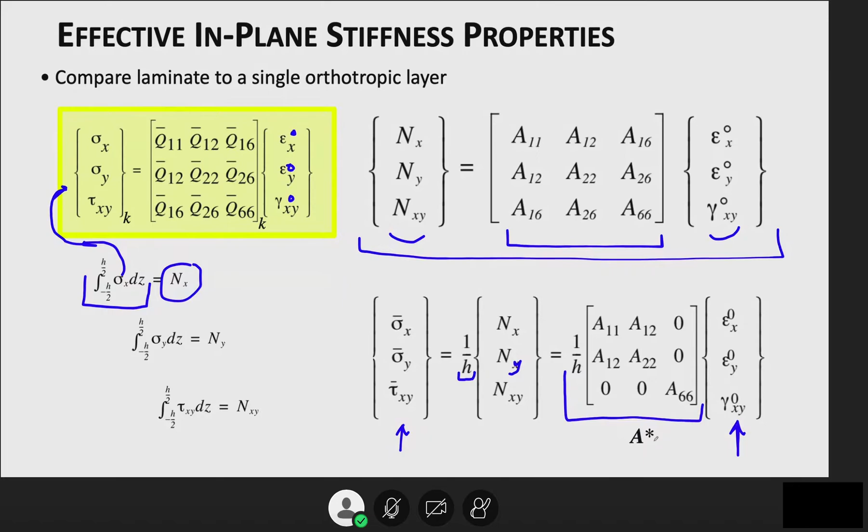And then I compare that relationship to the in-plane stiffness properties of an orthotropic layer, which has some Ex, Ey, Gxy, and if I take the Q for it, assuming the thickness to be H, I can make the comparison between these two, and I can solve for Ex, Ey, and Gxy in terms of the A's. So my overall effective stiffness Ex is now written in terms of this A matrix: 1 over H times A11 A22 minus A12 squared, divided by A22. This is sort of a modulus for the entire laminate in the x direction.

So given the A matrix of a laminate, which could be 100 layers, 200 layers, as long as I can compute the A matrix for it, divided by the total laminate thickness, I get a modulus for the entire laminate in the x direction.

And then similarly, there is a relationship for EY. The only difference is now this divides it by A22, this divides it by A11. EY, the modulus of the entire laminate in the Y direction, is computed from the A matrix this way. The shear modulus is simply A66 divided by H, and the Poisson's ratio is the ratio between A12 and A22. Okay? These are now my effective properties of my laminate.

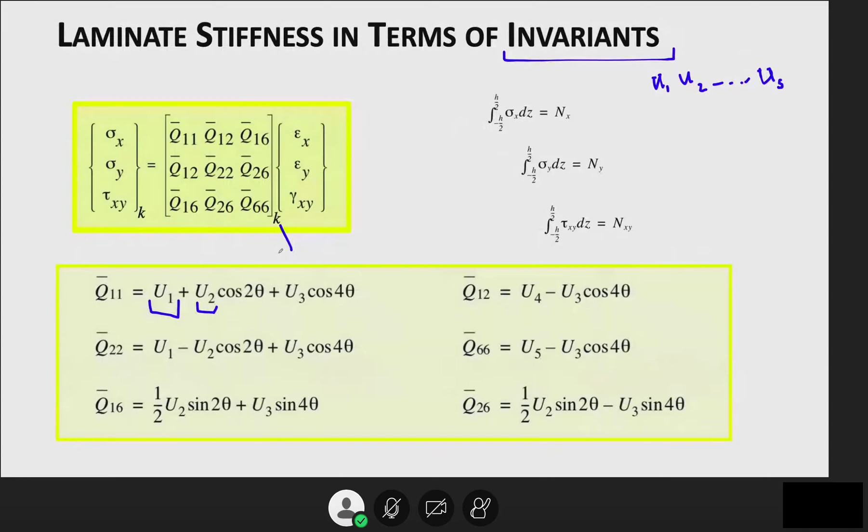I jumped again. Cosine theta is not a continuous function, it's actually a piecewise function. So we made plots of theta as a function of z. This was z, and the variation was maybe 45 degrees, then minus 45 degrees, then 30 degrees, then minus 30 degrees, then 0 degrees, then maybe some other angle. So this is a piecewise variation, but we're writing it as continuous. That means these can be turned into summations as well. But as a definition, V1 is the integral of cosine 2 theta dz.

If we do that, we get the matrix form in terms of V0A, and A11 will be U1 times V0A plus U2 times V1A, no V2, and U3 times V3A, and no V4.

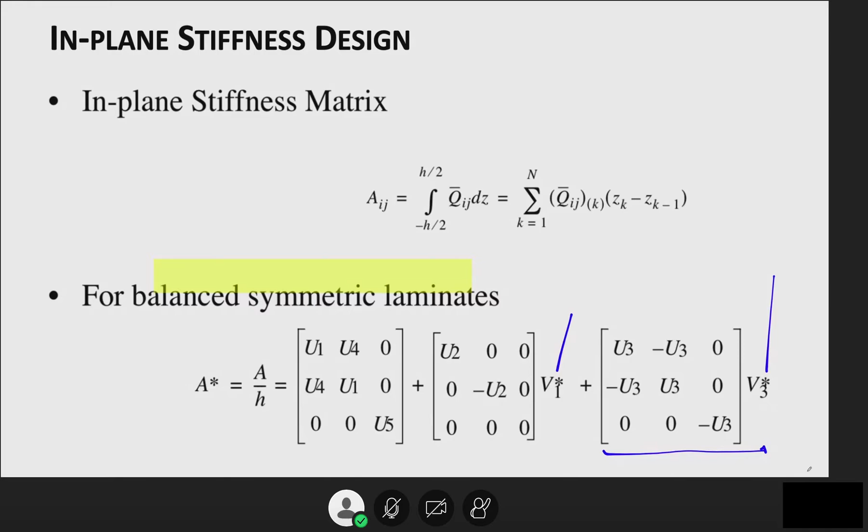And then V3 star is the integral of cosine 4 theta. You see, we again split the design quantity A into some material property constant times nothing, plus another material quantity times the integral of the orientation angles, V3. So, in fact, for this problem, the A star matrix is defined completely by two quantities, V1 star and V3 star, which are integrals of these.

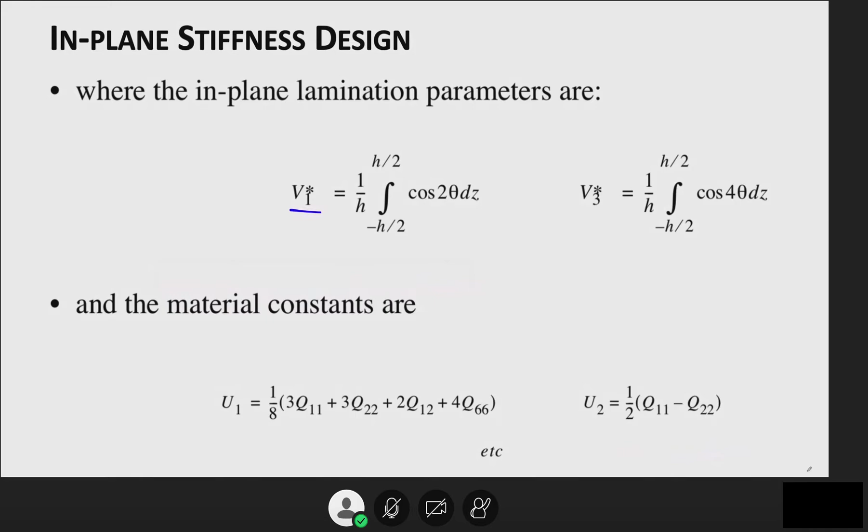After this, we are going to start calling them lamination parameters. And instead of the integrals, we're going to replace them with summations and come up with these new definitions. But that I will do in the next lecture. And then we're going to be able to generate very nice plots called Miki's diagram that you'll be able to actually design with. Regardless of the number of plies, each point in this diagram will be some stacking sequence that will meet all of our stiffness requirements. Okay, but we're going to start doing that next lecture.

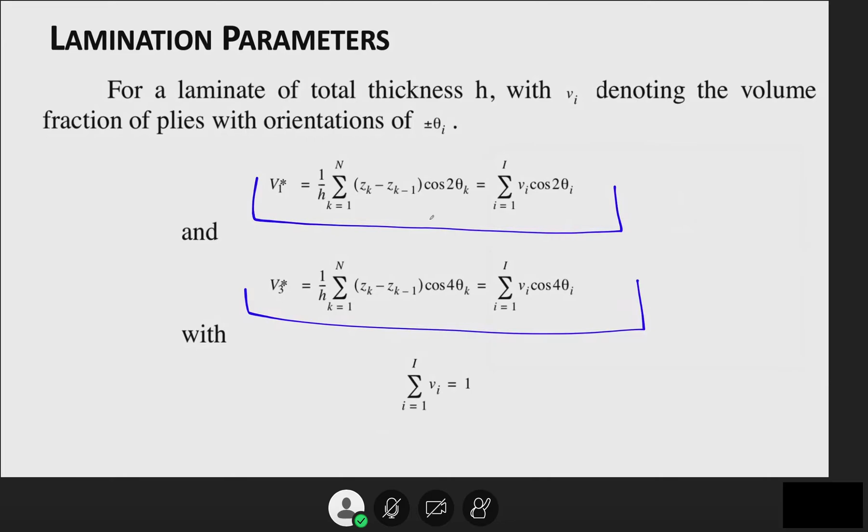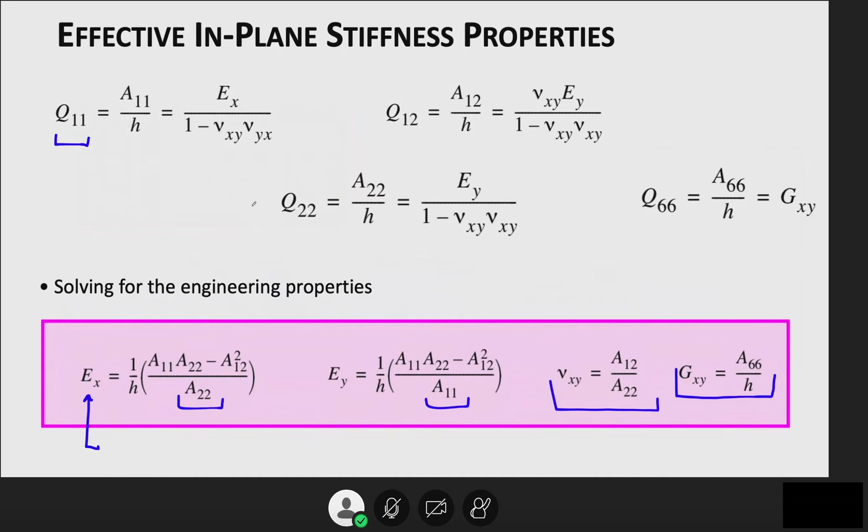So going back, now we're going to concentrate on what we call the effective in-plane stiffness properties for the laminate, EX, EY, GXY, and νXY. Any questions so far? Questions?

It's 7-1. Mohan also wanted a project, so let me mark that as well. And are we still missing?

So the lamination parameters are a function of what ply angles you are using. That's absolutely correct. So everything about orientation stacking sequence design is lumped into an integral of all of those orientation angles. Even if you have 100 layers, you integrate them, and you'll be able to write the A matrix for that laminate.

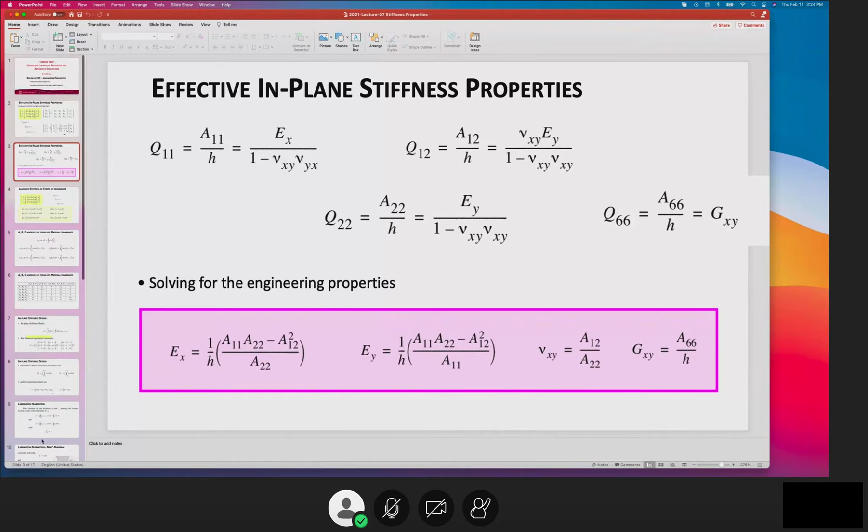So here, all of the ply orientation angle information in the A matrix is in V1 star and V3 star. So regardless of the number of layers, if I assume V1 and V3 star to be unknowns, and I have a stiffness requirement that A11 has to be a certain number, I don't have to know the orientation angles. I can find V1 star and V3 star as continuous values. I can analytically solve it.

And then any laminate whose integral of the orientation angles meets this will be an acceptable laminate. And there will be hundreds of different laminates that I can use that will meet the same design requirement in terms of stiffnesses. This is the crux of the matter. So it's a really nice thing, but we're going to learn how to do that in the next lecture. Okay.

Any other questions? So, by the way, the reason I said this is, if you're not reading your messages, Alex was asking if the lamination parameters are only functions of the ply angles. The answer was yes, and the integral of those through the thickness, regardless of the number of layers that you have. And you will see that these V1 stars and V3 stars are normalized quantities, and they only vary between -1 and 1, because it's the integral of cosine theta divided by the thickness. All right. Any other questions?

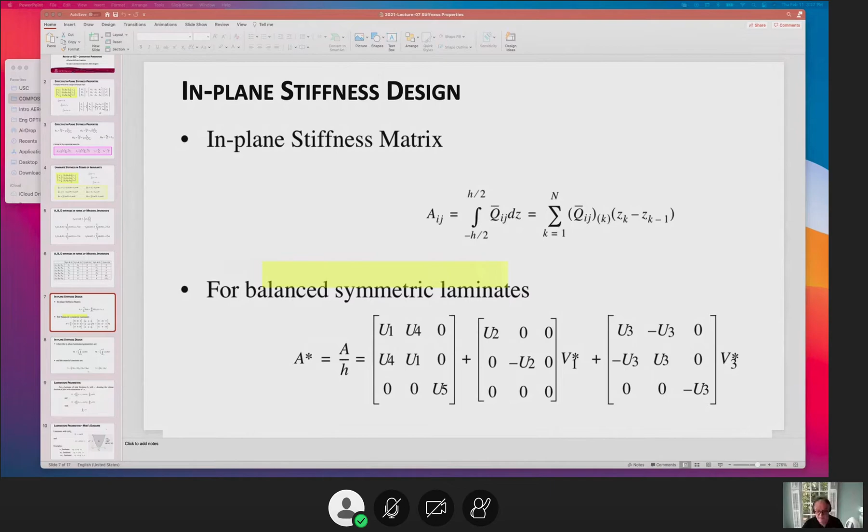Let me get some tea. And let's go and do our tutorial that you will, I think, find interesting because we see these equations all the time. Whether I should have recorded this lecture because Samuel is not there. Samuel is not there. I didn't record, but I can start recording now.

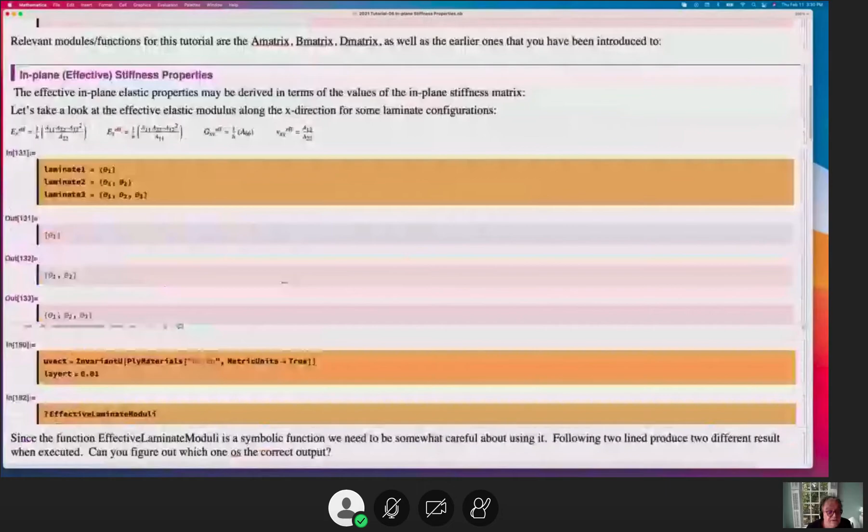Theta 1, theta 1, theta 2, theta 3. I do not know what those are right now. I'm going to leave them as symbols. But I'm going to do this for a specific material property called glass epoxy, and I'm going to use layer thickness of 0.01.

And the first module that I want to look at is called effective laminate moduli. What would this do? If I give a list of stacking sequence, and if I provide the invariant material property U, and if I have the thickness, it will compute EX effective, EY effective, GXY effective, and NUXY effective, and give them back to me.

This is just like calling the A matrix. Okay, we were calling the A matrix with the same quantities as well. This time, instead of giving me the A matrix, from the A matrix properties, it's going to compute the effective moduli.

All right, so effective laminate moduli, laminate 1, and I know what the U vector was. I defined layer T. They are defined up there, right here, and right here. So laminate 1 is single layer, theta. And if I use theta equals 90 degrees, or theta equals 90 star degrees, you can see that this is some quirky thing that I needed to demonstrate.

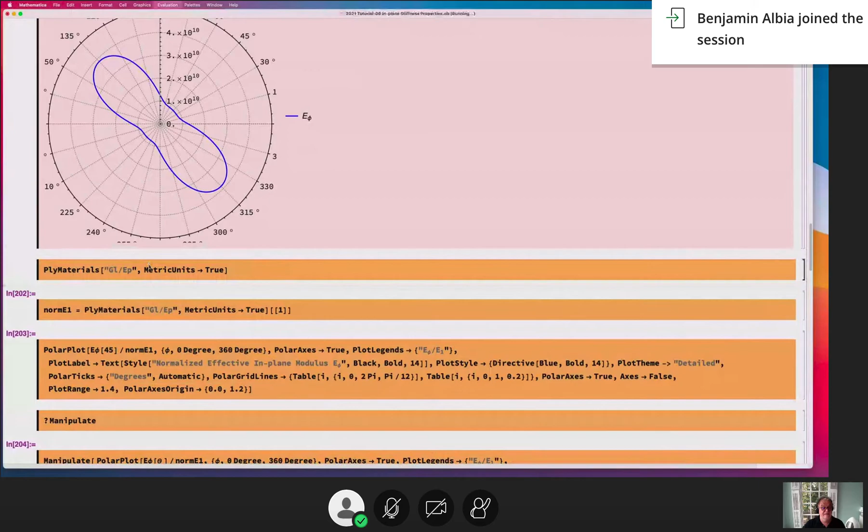And if I want to normalize this, I will normalize this with respect to E1. So I take the ply materials. This will give me E1, E2, G12, nu12 for this thing. And take here the E1. So to normalize, I'll use the normalized E1 value of 3.86 by dividing this E sub phi by norm E. So my plot now is with respect to 1, where 1 is the modulus of it, so 45 degrees. This contour is equal to 1. Okay, you'll see the use of this later on as I go to 2 layers and 3 layers.

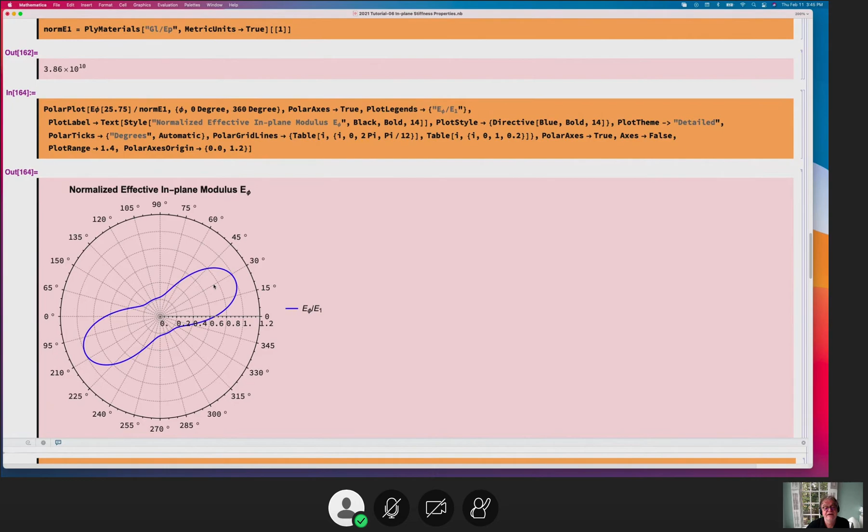So 25.75 layer. This is the largest stiffness, which is normalized 1. In any other direction, in the perpendicular direction, this is only 20% of the longitudinal modulus. So if you're here, this is, I think, 50% of the, each slice is 20%. So this is 20%, 40%, 60%, 80%, 100% of the overall stiffness.

Then I can actually use Manipulate for this function and put here theta and change theta from minus 90 to 90. So for 0 degree, that's what I have. For any other orientation, I can see how the stiffness properties are viewed from different directions. So for a 90-degree ply, this is the strongest direction in the 90-degree ply. It's a 45-degree ply or so.

And these things are going to get a little bit more fun when we go to things like laminate 2, which has 2 angles. And E sub phi for this, 2 angles. So for 2 different angles, this will be the relation as a function of phi. So if I take a plus 45 minus 45 layup, okay, and execute, this is what I get.

This is a plus minus 45 layup, 2 angles. So its modulus, again normalized with respect to E1. This is 1, this slice. Way lower than that. It's actually about 30%. The largest modulus is at 45 degrees, and there it only reaches 50% of the possible E1 that you can have for this laminate. So 45 and minus 45 is not necessarily a very good thing.

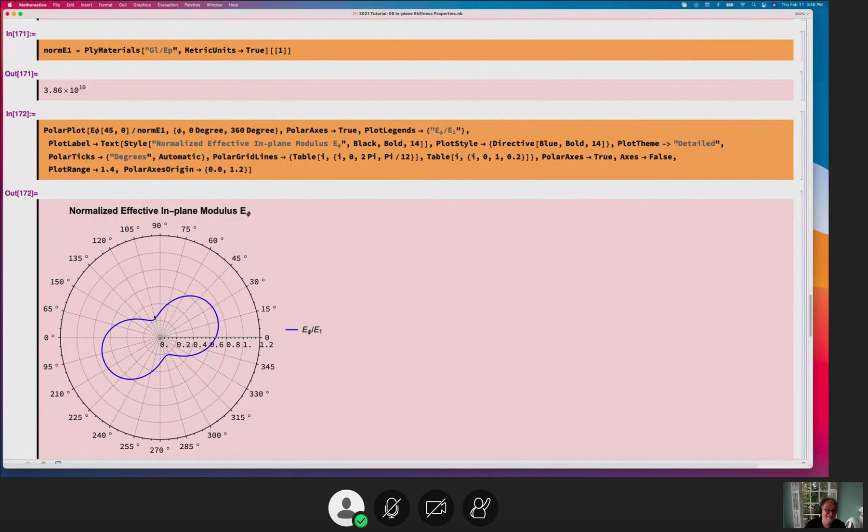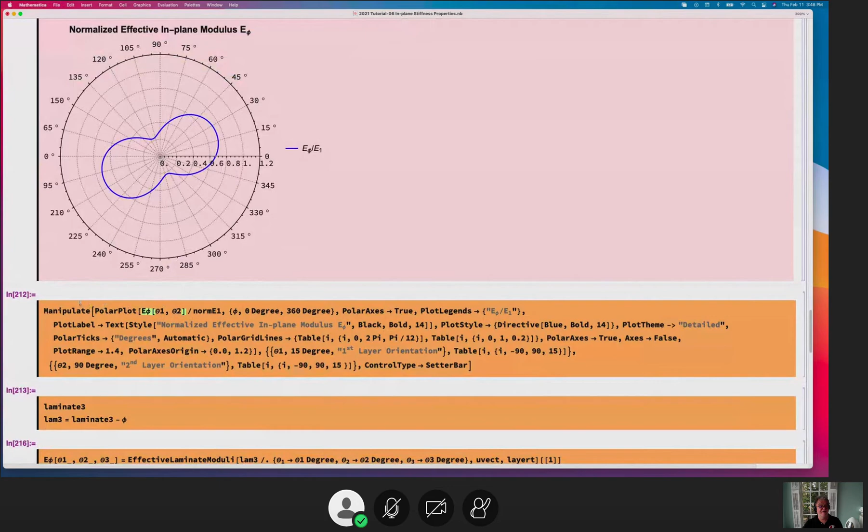And so let's do other combinations. This is a 45 and 0 degree layup. And that's how it looks. The largest stiffness for a 45-0 layup is here at around maybe 20 degrees or so. It's pretty good in the X direction. Y direction stiffness is still lousy, a little more than 20%. It's about 30%. And lowest one is in this direction. And this was 45 and 0. Now, of course, what I will do next is put theta 1 and theta 2 here and put it into a manipulate to change theta 1 and theta 2 independently.

So for a 0-0 layup, this is what I have. For a 0-90 layup, this is what I have. The largest modulus is in X and Y direction of about 60%. And lowest modulus is at 45 degrees. It's a little better than 30%, but not very high. This was a 45-0. This is what I get. Plus minus 45. This is what I get. What else can I try?

30 minus 30. This is what I have. It has a pretty good stiffness here. Lousy stiffness there. Larger region where the stiffness between 30 degrees and minus 30 degrees is fairly high, but not very good in that direction. So there may be an application where you would like this compared to this, or any other combination that you might have. Okay. Is there anything more interesting that I can show you about this?

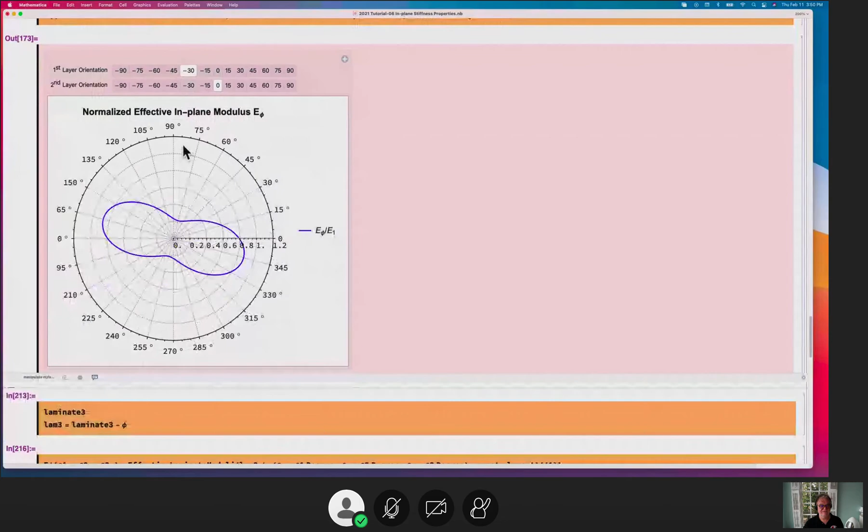Let's go to 3 plies. Same story. We don't have to spend too much time in there. We can actually go directly to polar plots and normalize one. And so this is a plus 45, 0, 60 layup. But if I want, I can put it into manipulate. Have 3 different orientation angles. This is all 0. And this is all 90. If I have 0, 90, 0, that's that. If I have 2 zeros and a 90, that's that.

But let's do something interesting. 90, plus 30, minus 30. I've got a circle. What does that mean? This is the question, gentlemen. Stiffness is the same in all directions. That is indeed correct. Do we have a name for these layups, laminates? It can be treated in its plane as isotropic. Quasi-isotropic. That is absolutely correct.

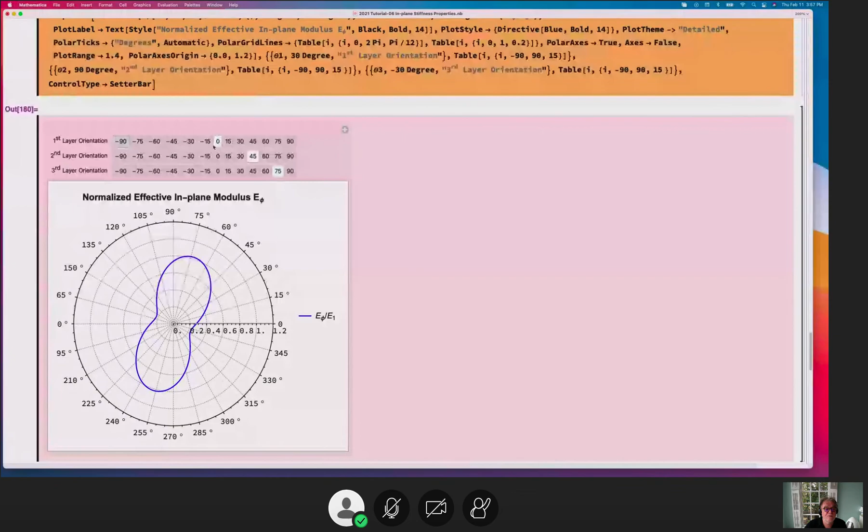One final thing that I want to show you is the magnitude of the stiffness between 3-ply quasi-isotropic and 4-ply quasi-isotropic. So for 4-ply quasi-isotropic, plus minus 45, 90, I have about 50% of the E1 achievable for me, about 50%. Let's check the 3-ply, 0 plus minus 60. That's also about 50%. Is it a little less or a little more? You have to actually look very carefully, and they are the same. Okay? So there is no difference.

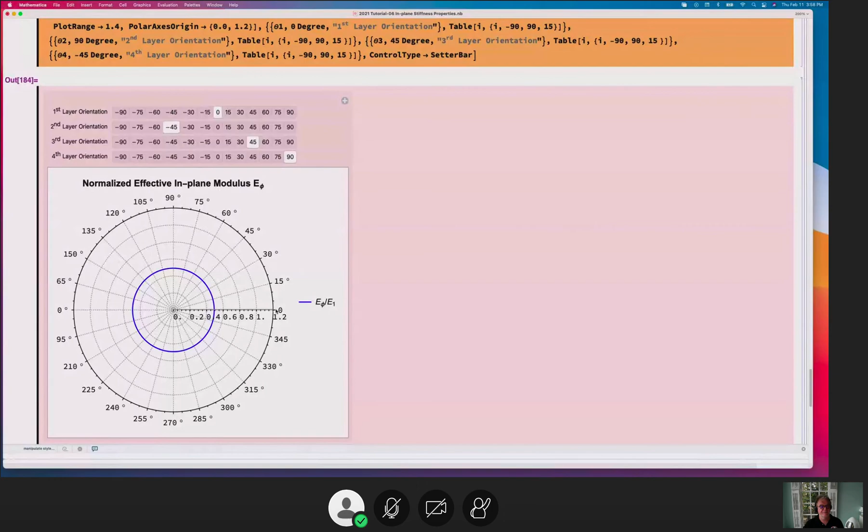But of course, people will prefer using the plus minus 45 4-ply quasi-isotropic more than the 3-ply, simply because differences in the D matrix, the bending matrix, would be larger for the plus minus 60, I believe, than this one. So it's closer to being isotropic, but not isotropic. But they're both quasi-isotropic.

All right, so I created this module now that's called polar moduli, and it can give you the effective stiffness E, G, nu. So say for this layup and layer thickness of 1, material again glass. I can compute the U vector, and if you call polar moduli, you need to read this a little bit more carefully. It says it gives you E, G, nu.

So it has two options: effective moduli index, the default one is 1, and normalized, default value is true. So if you want the effective moduli in the one direction, 1; if you put 2, that will give you G. And if you put 3, it will give you nu. So when you run this, I can run it, E sub phi, polar moduli. This is the default value. And this is the E, and I kept this up to 2.5 instead of normalizing with respect to 1.

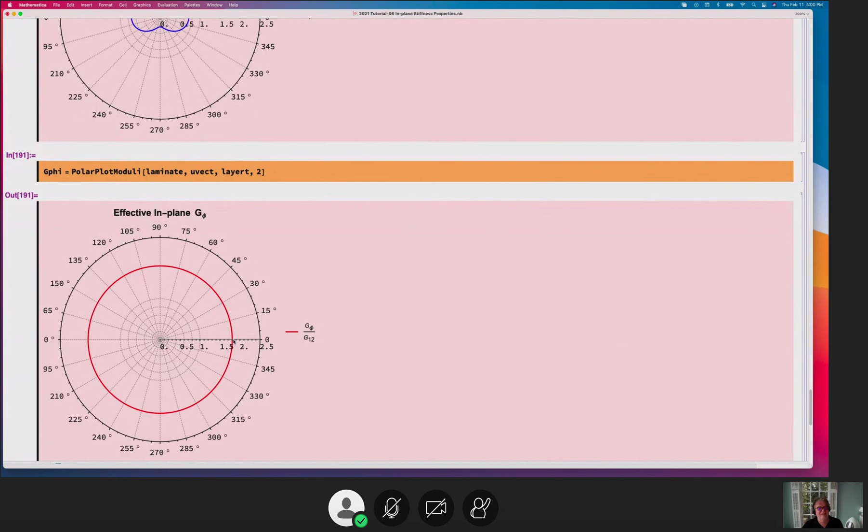Because as you will see, G value for this can be actually larger than the base value, and this is a 0 plus minus 30 degree layer. 0 plus minus. If I made it quasi-isotropic, I could have done this 60 minus 60. Let's see what that does.

This is quasi-isotropic, E value. G value is also here. That is quasi-isotropic G. But the G is actually larger than G12. This is normalized with respect to G12. So G value is larger than the single layer's G. If I make this again 30, I want to go back to 30 again.

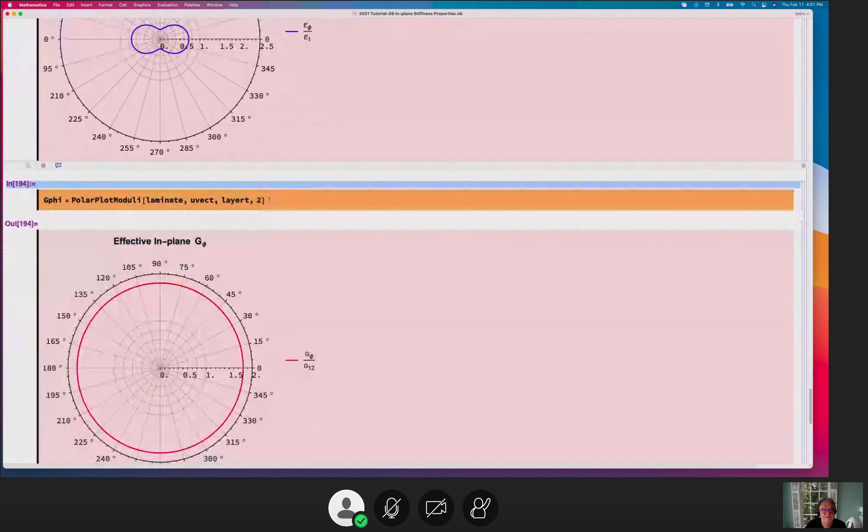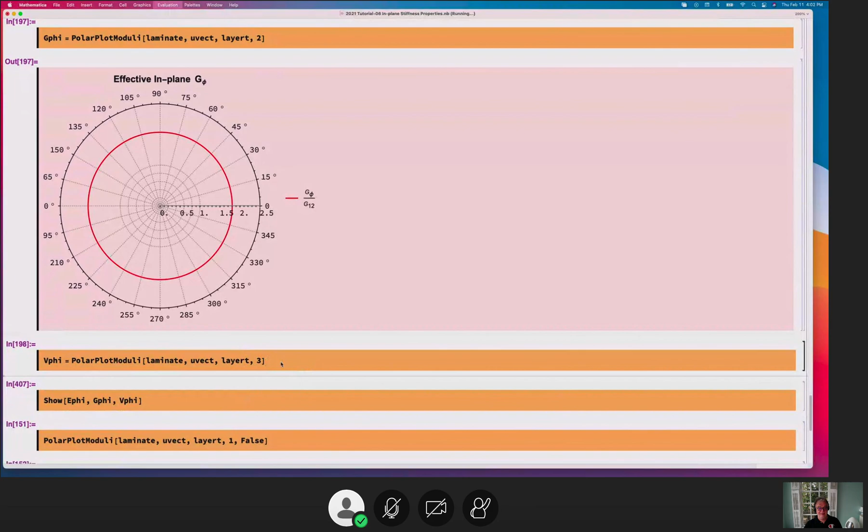And look at G. Actually, G is isotropic, although E is not. And nu, which is the third index, optional, is not isotropic. Well, this is the interesting thing about G. Once you put a layup with 0 plus minus 30, your G value is automatically isotropic, and it has a value. But if you put plus minus 60, that's also isotropic, but it has a larger value.

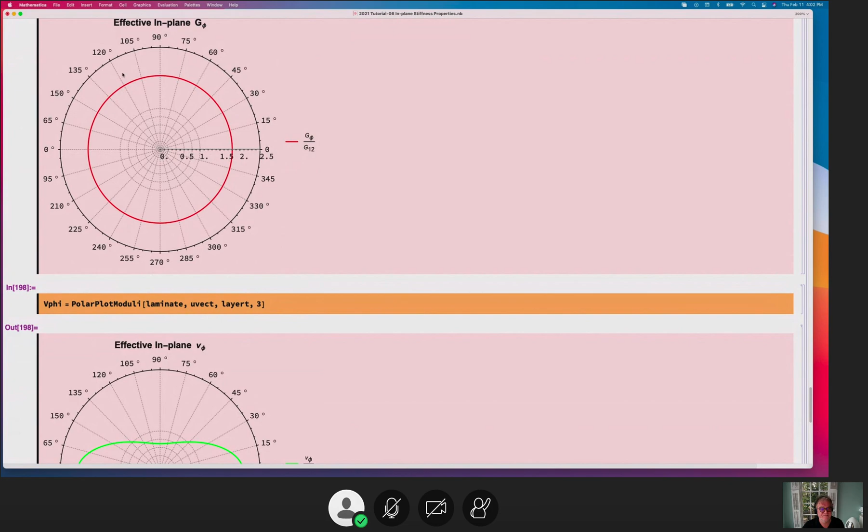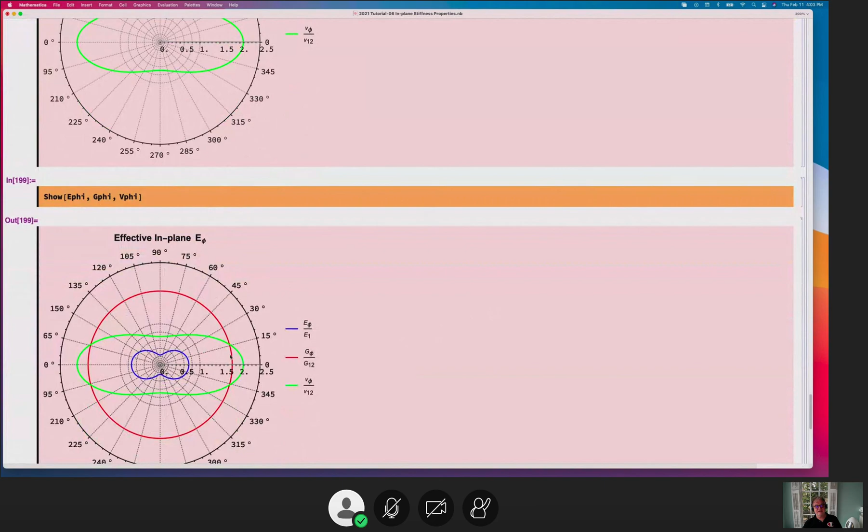So we can show all three in one plot: E, G, and nu. And you can see their relative values normalized with E1, G12, and nu12 values. So you can basically do a bunch of things, and if you want to put more layers and use Manipulate and let the orientation angles be variables, you can see how different ones are all changing in one plot. Okay, so it could be a very useful design tool for somebody who just wants to design the stiffness properties.

With that, I conclude my tutorial. You can run the rest of it yourself. This is for a laminate 0, 90, plus minus 60. I don't know why I ran that. 0 90, 0 plus minus 60. You can see their behavior. So this is 0 plus minus 60. E, G, nu, everything is quasi-isotropic, and their relative values.

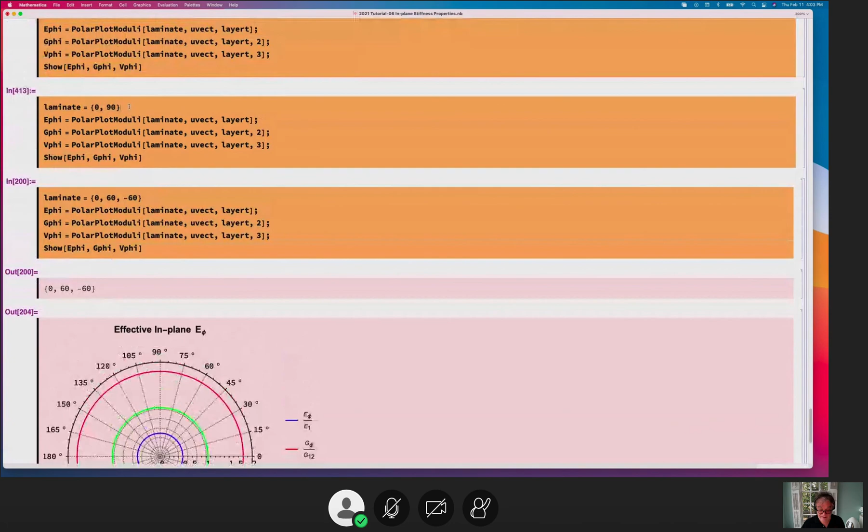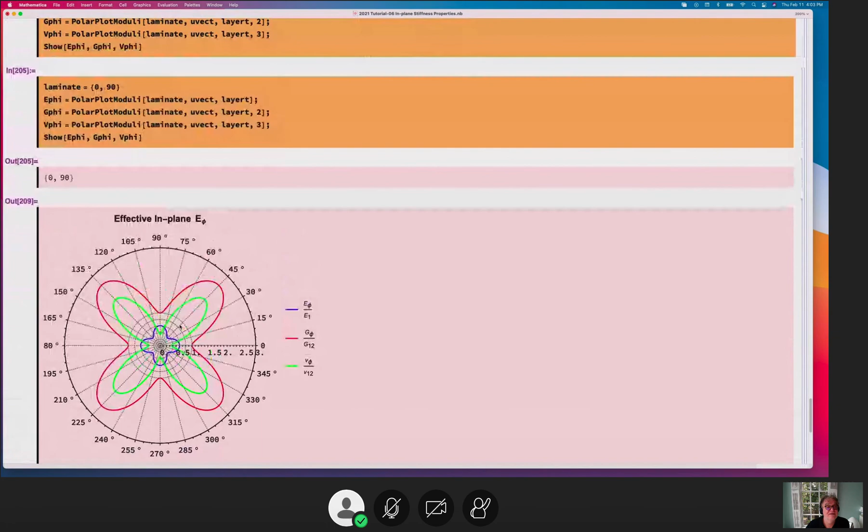We're going to do one also with lamination parameters, but that's not going to be part of the test or part of the project. We'll cover it next Tuesday.